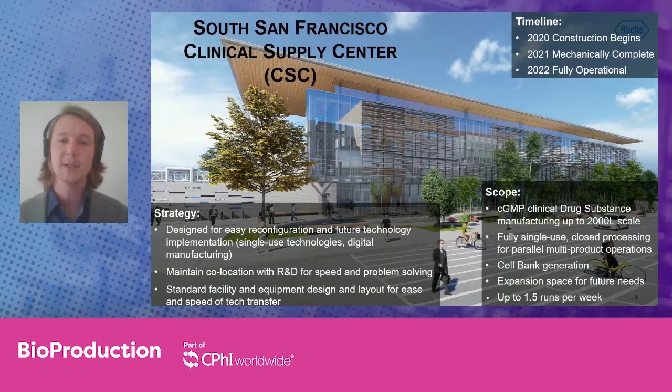The strategy behind this building is that it's designed for easy reconfiguration and future technology implementation, making use of things like single-use technology and digital manufacturing, while maintaining a co-location for our R&D colleagues in South San Francisco for speed and ease of tech transfer.

As I mentioned, it will be an agile, small volume facility that leverages new technologies and empowered people to bring innovative new medicines to patients at unprecedented speed. Having previously mentioned some of the elements of single-use technology and digital manufacturing, one other highlight is that we are looking to accommodate a wide range of known and unknown future process platforms and therapeutic modalities.

Some of the design highlights, and what we're running into as challenges which is the focus of this session, include elements of the design of the facility. There is no CIP and parts wash. Every single element of our process will either be single use or product dedicated. The entire manufacturing area for DS is in an ISO 9 ballroom without any separation between unit operations. Everything is closed or functionally closed via chemical sanitization, so there is no steam-in-place system or autoclave.

All of the equipment we're bringing in, as well as the automation, will follow a streamlined commissioning and qualification approach, leveraging ASTM E2500, as well as a paperless, entirely digital manufacturing area. Last but not least, the equipment portability aspect, as well as changeover leveraging single-use technology, allows for easy reconfiguration and movement of equipment within the ballroom and no product-to-product changeover downtimes.

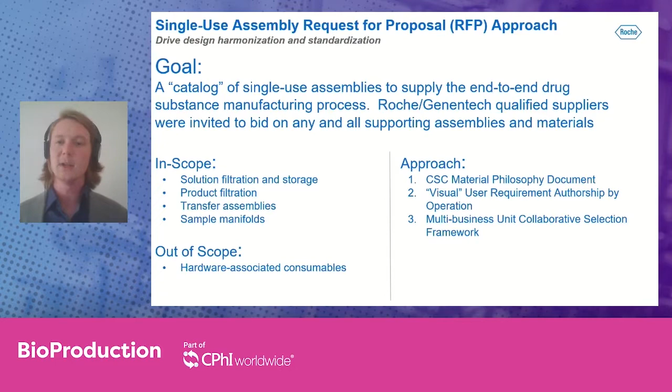Our approach for this request for proposal had 3 parts: first, the development of a single-use facility material philosophy document; second, the generation of what we called visual user requirement specifications; and third, a multi-business unit collaborative selection framework to determine which vendors we would be partnering with.

At the start of the process, we authored a single-use philosophy document, which listed out our qualified materials and connectors within the Roche Genentech internal network. In order to be considered for selection for our facility, all submitted assemblies were required to use Roche qualified materials, with an emphasis to the suppliers on off-the-shelf designs if possible as the preference. We also highlighted that we were standardizing our aseptic connectors, selected based on our previous Roche performance requirements, material of construction, compatibility, and internal robustness data.

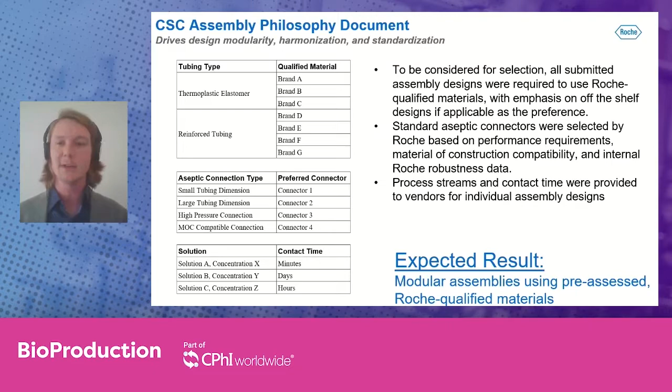Similarly, we provided the process streams and contact times that we were expecting to use within the facility to the vendors, with the idea that we would then collectively have modular assemblies using pre-assessed Roche qualified materials to supply all of our single-use needs.

The second approach and second element we added to the request for proposal process was authorship of a visual URS. This provided all of our supplier partners an idea as to how we intend to use the assemblies and connect them for our manufacturing process.

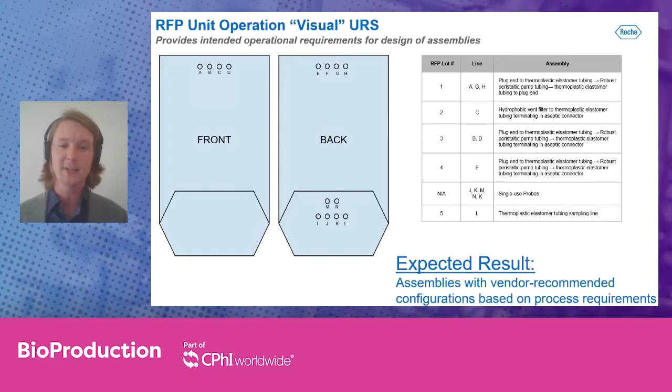What I've highlighted in this slide is a simple rendering of one of the bioreactor systems we used, with the individual items we expected to receive as part of the request for proposal. For each individual item listed as an RFP lot number, we provided simple requirements around what the assembly should look like, with the idea that the expected result would be assemblies with the vendor recommended configurations based on the process requirements we provided.

Last but not least was the selection framework. After having gone through this process and selected the vendors with which we wanted to partner, and receiving all of the relevant information as part of the request for proposal, we now had a catalog of assemblies from which to select, and created a business decision framework amongst three of our business partners - quality, procurement, and technical - to assess all of these pieces of information.

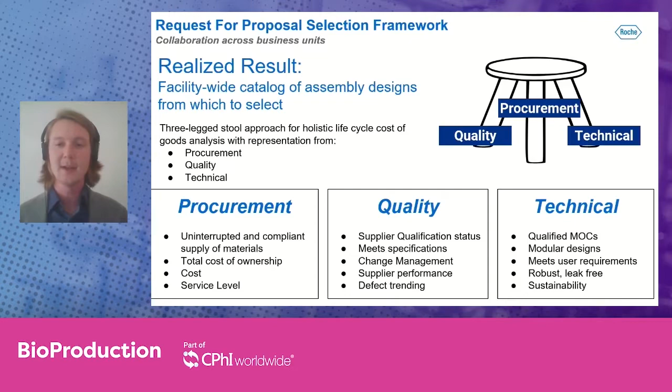From procurement, clearly compliant supply of materials, total cost of ownership, and service level were considerations. For quality, in particular, we focused on change management, supplier performance, and defect trending. And for technical requirements, certainly we reviewed the materials of construction, the modular design requirements, meeting our user requirements, and certainly with an eye towards sustainability as a differentiating factor.

The first table stakes, if you will, were: do the suppliers meet the quality and regulatory requirements that we have at Roche Genentech? It was a bit of an unnecessary step, as the 7 particular suppliers that we bid the business out to were all within Roche Genentech already, so we knew walking in they would meet that requirement. The next set of narrowing criteria was, did they meet the user requirement specifications set forth in the philosophy document and the visual user requirement document?

We were able to eliminate a supplier from that based on the requirements set forth in the request. The next step was looking at if they were a demonstrated global supplier within our Roche manufacturing drug substance and drug product network, which we were able to eliminate a further 2 suppliers based on that performance.

Last but not least, our narrowing and final criteria were elements around our strategic business continuity plan, operational delivery, and what the reported quoted lead times were for the vendors. With that said, we were able to narrow down our selection to a core list of 3 suppliers that we were comfortable and ready to move forward with based on some of the finer details of the request for proposal process.

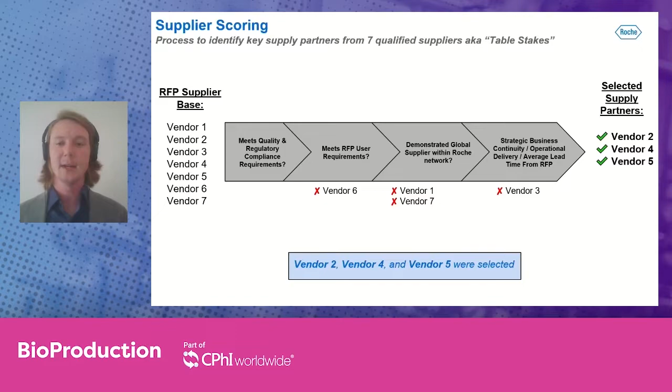With these 3 selected suppliers, we were able to specifically do a more quantitative analysis on some of the elements of their bids, and specifically do some direct head-to-head comparisons. What I'll highlight in the next 2 slides are 2 elements of the direct evaluation we were able to do. The first being, we were able to quantify the assembly price and lead time variance by suppliers pretty robustly, and really asked ourselves the question: just how different are like assemblies from various competitors?

For individual lots, individual assemblies of all of the different assemblies we were using and expecting to introduce, we were able to do a head-to-head comparison because at this point, based on our selection criteria, all designs were required and confirmed to have met the philosophy document and our user requirements.

So as a result, we could, on an item by item basis, actually evaluate the true cost difference with going with one supplier versus the other. And for some of the high usage or high criticality elements, we could also layer in the quoted delivery lead time as another metric for which we could evaluate against.

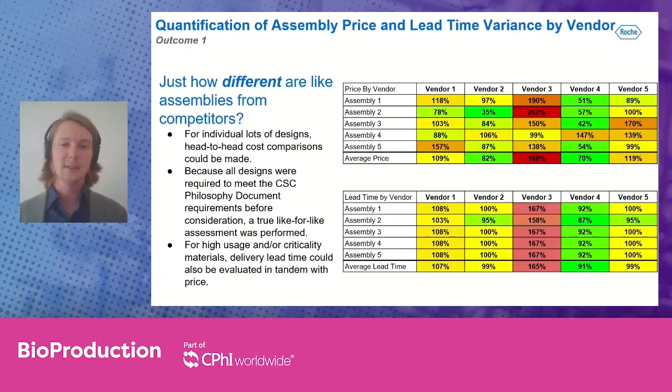And so having this true comparison and cost analysis enabled us to elucidate a really insightful comparison across these different assembly types. The second element that we also looked into was what is the quantification of the true price of partnership?

I'm sure many of you in the pharma industry are familiar with preferred suppliers or strategic partners for technology development. What we were able to do with this process was actually quantify how much that cost would weigh into our manufacturing operations on a holistic unit operation basis.

And so another exercise we did is if we selected those suppliers that were our strategic partners, what would be the opportunity cost in a manufacturing facility for that moving forward?

And so this drove some very robust, heated, animated discussions amongst not only our technical and procurement partners, but our development colleagues as well, to really pressure test truly what was and what is the purpose of those partnerships and how we can continue to drive value in a facility by exploring alternates.

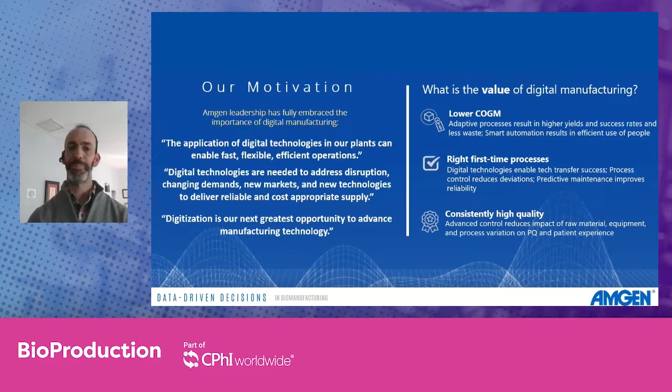But what have we done? We're not starting from scratch today. Over the last 5-6 years, there's been a lot of evolution in the way we organize and use data at Amgen. For example, we have a pretty amazing enterprise data lake and data fabric and analytics layer on top of that, allowing us to access data in ways that used to be almost impossible, and to create striking visualizations and dashboards that people can use to better understand the processes we're running and how they relate to other things we need to pay attention to. That's very important to us.

We've solved one really big, long-standing problem. The other is that we're now using tools pervasively that used to be relevant only to niche areas at Amgen. For instance, real-time multivariate process monitoring is available in every one of our plants today. It's really recognized as an essential way of running our operations.

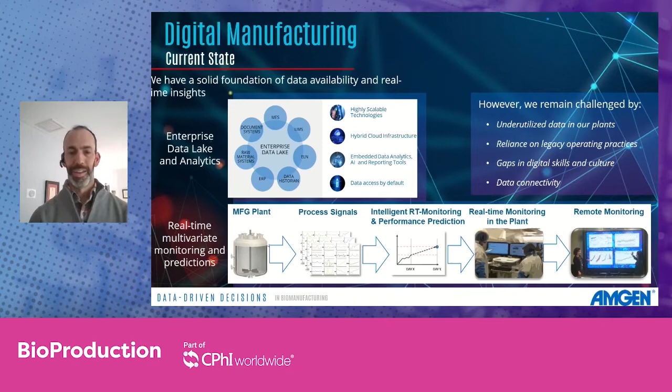Now let's talk about where we want to go. First, this also happened to be shown by Thomas earlier today, with a different twist. This slide was presented by Maria Perry from Amgen a couple years ago at a conference. At that time, when we talked about the future, we talked about how to enable these predictive technologies and analytics in the way we operate in process development and manufacturing. That is now pretty much what we do today. Maybe not everywhere yet, but there are pockets of it, and at the very least it's a near-term expectation that that's how we'll be operating.

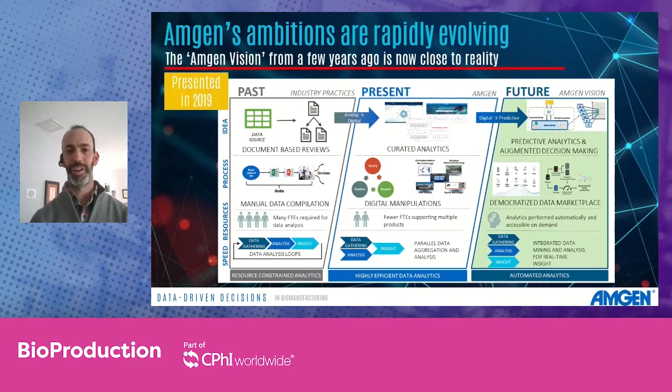So the future now is a little bit more aggressive, I would say, or ambitious perhaps. We are thinking about not just predicting, but how do we create this adaptive operation where you have the ability to respond in real time to changing conditions in your raw materials, your equipment performance, your supply and demand, and your labor resource availability.

All the things that you have information on today that are perhaps either manually used to change things and how you're operating, or maybe not used at all. We want to build that in so that we have plants that can adapt in real time. And maybe this isn't something that's available next year, but that is at the end of the tunnel.

That's where we want to be. And our group is very much engaged in this strategy discussion, but also thinking about what are the things we're going to lay down today as the groundwork that we'll build upon for these future aspirations. And for us, that means starting from the real-time process monitoring, which I mentioned is really everywhere already, to looking at how do we embed more of these predictions and forecasts in our operational decision making, to then moving beyond even prescription to adaptive control of our processes, very narrowly focused on how do we control our processes more optimally.

But once you establish that for a unit operation and then start thinking across unit operations, how do you control more optimally, you can build on that to enable some of the things we talked about around this adaptive plant way of thinking. And maybe most importantly, these digital technologies are not just going to be used to operate a plant in the same way we do today, but maybe faster or more efficiently.

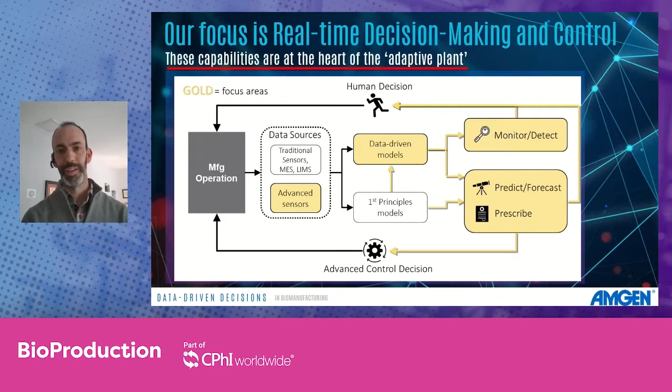So what I'll do now is talk a little bit about three projects along that spectrum, from monitoring to prediction to control. And if we start on the monitoring end, I mentioned we have a use of these multivariate monitoring tools in our plants today, but primarily that's used for process monitoring. So when you actually have product and a piece of equipment, you're monitoring how that process is evolving. But what about the equipment itself?

This is something that's been a struggle for a long time at Amgen, at least, where historically we have used calendar-based maintenance. And if you think about the analogy with your car, that means let's say you schedule an annual appointment to get your car checked, maybe every June, and maybe that works sometimes, but sometimes something can go wrong in the meantime, and you miss it because you weren't going as soon as you needed to.

From calendar-based, you can move to meter-based, where it's sort of the odometer analogy. Now you're looking at how much mileage do I have on my car or a piece of equipment. And based on that usage, things that get used more may need to be maintained more often.

And at least that gets you a little bit closer to doing it when you need to. But it's still not taking advantage of this richness of data that we have available.

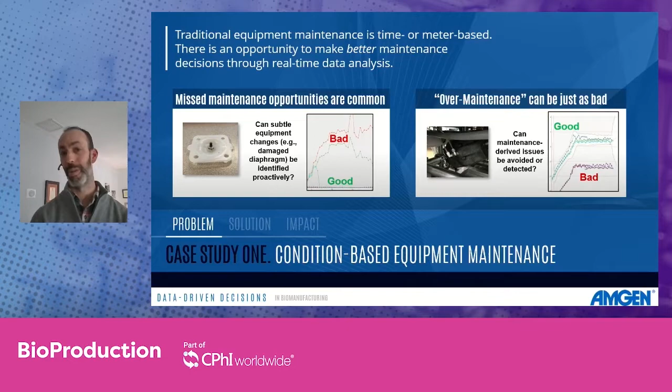What we're looking at here is what we call condition-based maintenance, where you're just monitoring the data and looking for signals that are telling you something has changed. And based on that information in the signal, can you make a decision or better decision about when to maintain your equipment? We were fortunate to already have a great platform in place that we built upon.

And now we have what we call a check engine light, again to the car analogy, to let us know when a piece of equipment looks like it needs at least a checkup to see if there's something required. And we've had a great amount of success around this project.

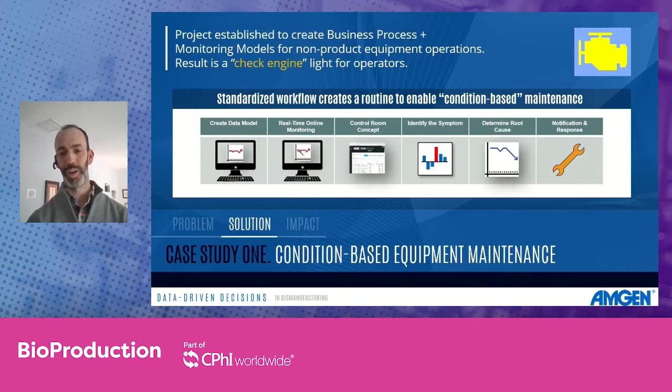It was piloted at our Rhode Island site, dozens of success stories, at the very least telling us, or maybe saving us an unexpected maintenance activity so we could anticipate something and schedule it at a time when it made sense, to cases where we actually may have saved a catastrophic equipment failure that could have resulted in batch loss eventually. So the success was so great that now it's being expanded across our manufacturing network as a standard for how we monitor our equipment.

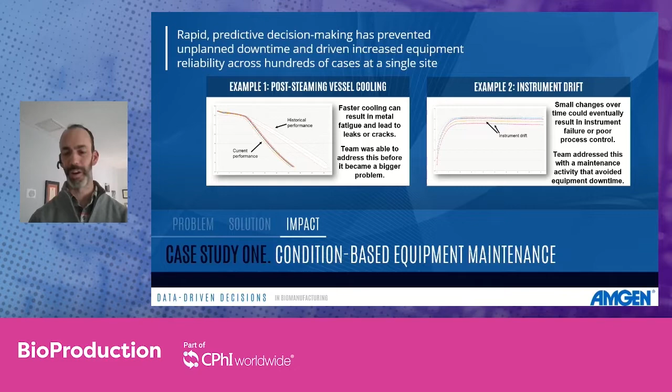So from the monitoring stage, now we can talk about prediction. And one of the challenges we have with prediction models is, number one, they're time consuming to build and update. And number two, it requires people with specialized skills to do this.

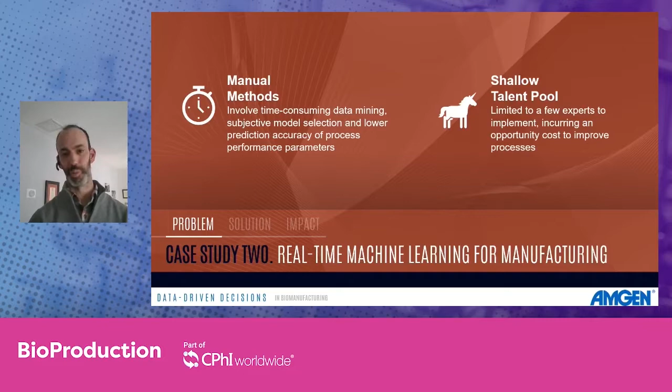And so we asked ourselves, can we apply machine learning, which will allow a model to learn on its own and adapt and change over time without manual intervention, to do some of this work for us? We created something we call real-time machine learning, applied it to our plant in Puerto Rico in one specific case, looking to predict titer for one of our processes there.

The model itself selects from a number of algorithms based on the data and data structure available. It makes a prediction, then puts it into a visualization that lets people dissect the information around that prediction to better understand what the drivers are and make a decision off it.

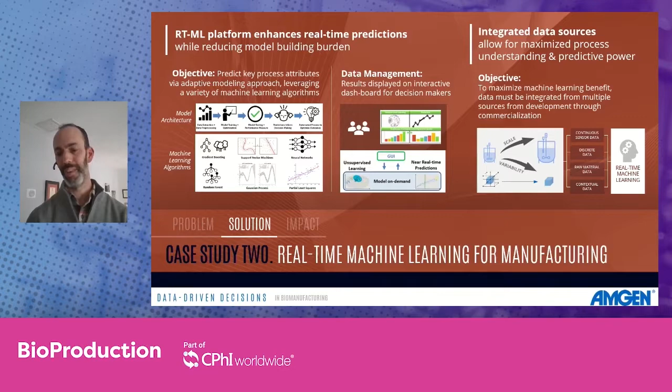And this too has been quite successful. Not only has it allowed us to reduce the amount of manual labor from modeling, but actually the predictions themselves were better than what we got off our more traditional methods. So this was a very exciting thing to see.

This is now also being expanded into multiple places. And maybe the most important point here is that, and this also applies to the previous example, we don't want to just make one good model one time.

We want to do this in a way that it's standardized and scalable so that you have essentially a module that you can take out of one instance and plug into another and just reconnect those pipelines with very minimal change or adaptation over time, so that you can scale this thing out super quickly once you have that proven in one place. That's very important to us. We support all of Amgen's sites around the world, so the quicker we can move from pilot phase to a full-scale implementation, the better for everybody.

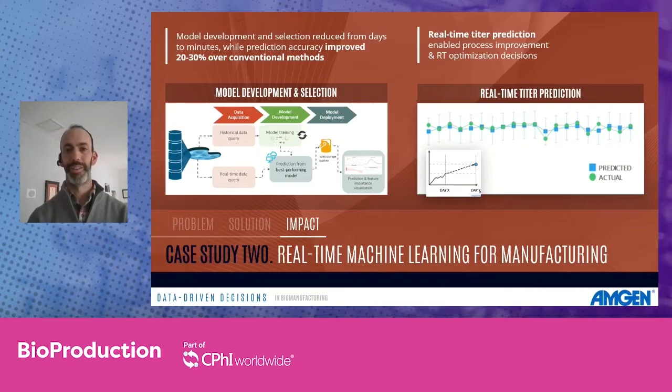And the final case I'll mention here is now on the control side of things. As you know, in our industry, we tend to control things in very narrow ranges within our design space. And that's for a reason, right?

We want to make sure we have very consistent control setup. We're very comfortable doing that. We have a lot of great history that's been proven doing it that way. But while this allows us to run our processes very consistently, what it doesn't do is allow us to respond to changes in our inputs such that we're always optimizing the outputs out of our process.

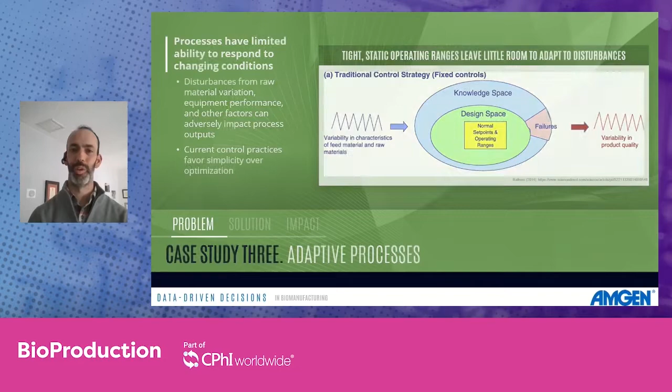And the opportunity here then is to apply a different type of control. We're looking at model predictive control here to ensure that any disturbances to our process, whether they be from raw materials or equipment or otherwise, are accounted for as we're controlling the process, and we're constantly looking at what that means for our outputs.

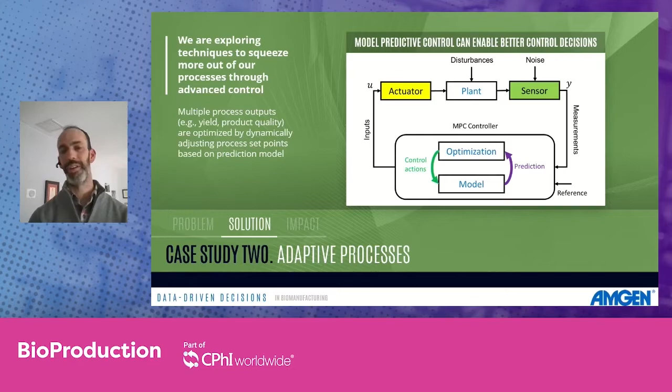We have good success in the labs already doing this historically. We're now doing some simulation work to refine the approaches we're taking here, and going back to the labs later this year to prove it out.

But maybe the most important thing to mention here is that we really see this work, while it's maybe very narrowly focused on a bioreactor today, as the cornerstone for a lot of that future vision that we talked about before.

If this can be proven in one case and then shown to be scaled from there, this forms the groundwork for where we want to be with an adaptive plant concept.

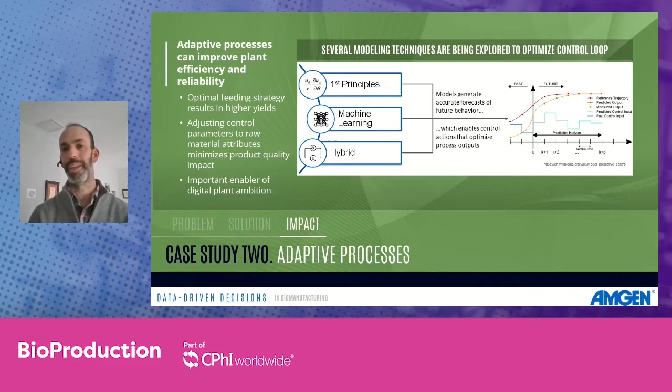So in closing, just to review a couple things we talked about. The motivation is that we have this interesting convergence of opportunity and business need, as well as the maturity of technology relevant to meet some of those needs. The ambition from Amgen is clearer than it's ever been to create this digital plant vision, where you have an adaptive set of processes and infrastructure that allows your plant to continue to optimize. In our group, we've started applying these concepts in some very simple cases to prove them out and start building the foundation for what we want to see in that ambition down the road.

So with that, I will wrap up and be happy to take any questions from the audience. Thank you, Chris.